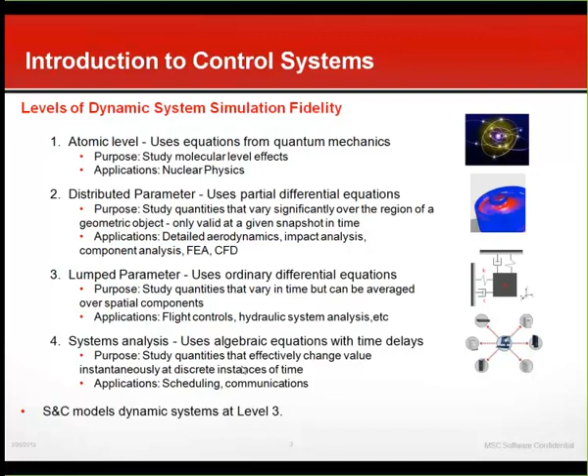Okay, so what do I get from the systems and controls modeling? The output is typically some plot of an engineering parameter, like the pressure at a certain point in your circuit, or maybe a flow rate through a valve, or a temperature somewhere as a function of time. So it's kind of performance type analysis.

Or maybe you're only interested in the steady state analysis, not the transient analysis - like maybe an aircraft environmental control system, where only the steady state performance is really important. Or maybe you've got a system with feedback control and you want to know if it's stable.

An example of that might be a nose wheel steering system on an aircraft - something that has a servo valve, and by changing the gain, if you make it too high, the system can go unstable. So that's a perfect application for control system analysis.

Another nice thing about this level of modeling is that you don't utilize CAD geometry, at least not directly. That makes it very useful in the early stages of design when CAD geometry isn't available, but you really need to hammer down design requirements, like how big your actuator diameter needs to be, how big your valves need to be, that sort of thing. So that's where it really comes into play - in the earlier stage when you're setting design requirements.

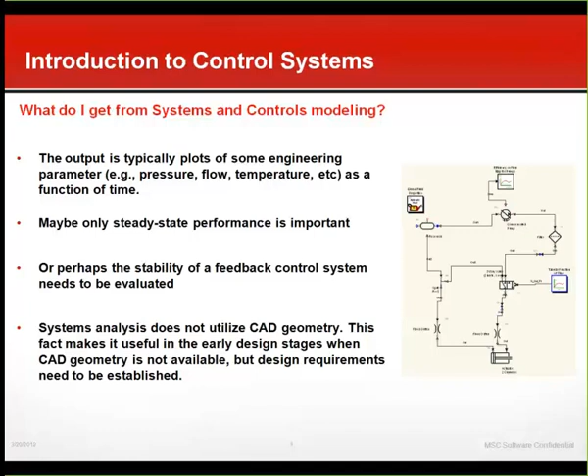There's a couple of different ways you can model systems in these type of programs, like I'm going to talk about with SimXpert, but they all use a block diagram approach. Let's say we start with a simple mechanical system we want to model, like this mass spring system. If you do a simple force balance on it, you can see that the external force minus the damping and the spring force equals mass times acceleration.

So if we wanted to create a block diagram of this model that we would use in a control system package, not just ours but pretty much every package works this way, what you'd want to do is solve for the highest derivative, like I've done here, and then you'd pretty much go from there.

So you can see you'd create a summing block right here, and you'd sum in the external force, the damping force, and the spring force, and then you'd multiply that by 1 over m. That's what this 1 over m here is, and that would give you the acceleration.

Well, the schematic's not quite done yet because everything's got to be hooked up, right? So what we do here is we'd integrate twice. As you can see here, I've got two integrator blocks. And so after I've got the first derivative, I'd pull off that and multiply it by B and feed it back as the damping force.

And then for the spring force, you need to have Kx, right? So now you'd pull off of the second integration operation here, so we're going to have x at this point. You multiply that by k and feed it back. So this is how you would represent a control system in a block diagram. This is kind of the brute force method. If all you have is a differential equation and you need it solved, this is how you would do it.

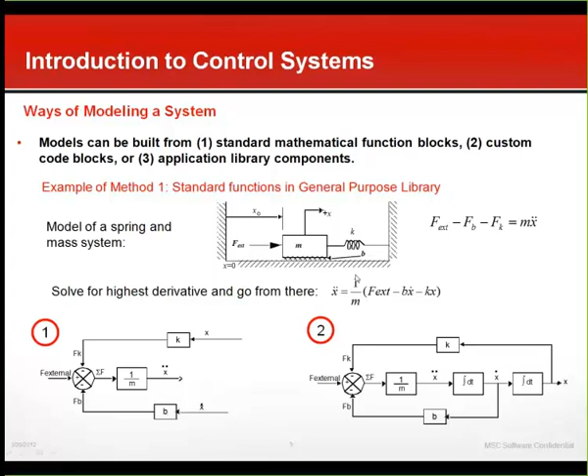But there's other ways to do this in our software. Another way you might want to do it is maybe you want to create a block of your own, and you want to do your own calculations behind that block. So you could create a custom code block where you specify what the inputs and outputs are from the other blocks in the system, and then you write some code around that, basically either in Fortran or in C, to calculate the output of that block based on the inputs.

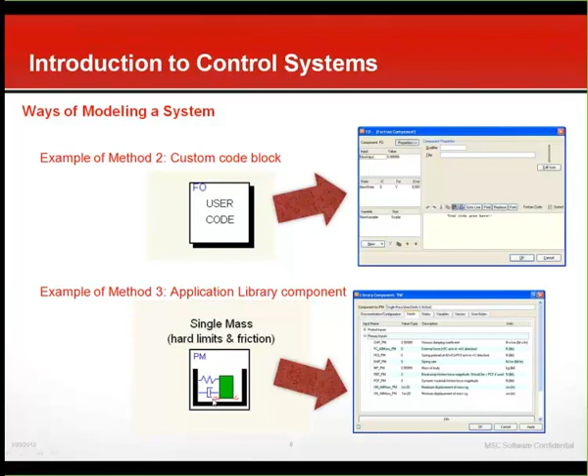And then the third method, if you've got a really complicated system, obviously you're not going to want to write all the differential equations out. So we have libraries that have blocks that include the differential equations behind them. In fact, we have a block called a single mass block, which is effectively a mass between two hard limits with a spring and a damper. So you could just drag that block onto the circuit and be done with it. Basically all you have to do is specify the mass and these damping and spring constants, and then you'd be done.

Okay, so what about applications? Well, we see applications in almost every area of engineering you can imagine. This lists various ones here: powertrain, controls, automotive, flight dynamics, you name it. We've got customers that are modeling these types of systems.

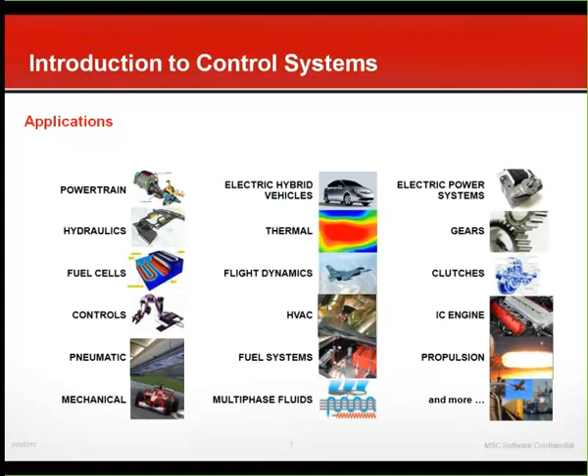And then what happens too, we find often, is that somebody's modeling a plant or some kind of system or controller inside of our solution, like whether it be SimXpert or Easy5. And typically, if they're trying to control something, they want to hook it up to a mechanism, because that's often the case. You can think of something like an active suspension. You'd want to model the mechanical parts in the motion side, but then the hydraulic controls you'd want to model in the system side, and then eventually the idea is if you marry them together so that they're solving at the same time, you'll get a much more accurate solution.

Because quite often there's quite a bit of coupling between the dynamics of the two systems, and so you can't really just analyze one side of the system independently without making a bunch of simplifying assumptions that could get you in trouble.

Another thing we can do is we can also account for part flexibility on the motion side. So you can think of maybe a part on this ATV here, like maybe the suspension component. Maybe it's important to model the flexibility of that. So we have ways that you could create a finite element representation of that rigid body and then bring that into SimXpert from the structures workspace, and now you're able to tie in both motion, or all three actually, motion, controls, and FEA in one environment. So it's pretty powerful capability that we have here in SimXpert.

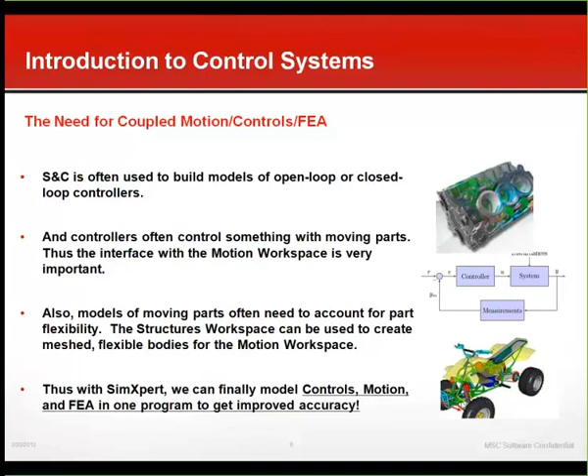Okay, so next slide. So what would be applications that were good candidates for this?

Basically any type of industry or problem where you've got this coupling of motion and controls. Like an active suspension, a missile guidance system, or the hydraulic control of a mechanical backhoe. In manufacturing, there's robots for assembly. In aerospace, you could have a flap system driven by a hydraulic control system. So there's really an endless number of applications for this.

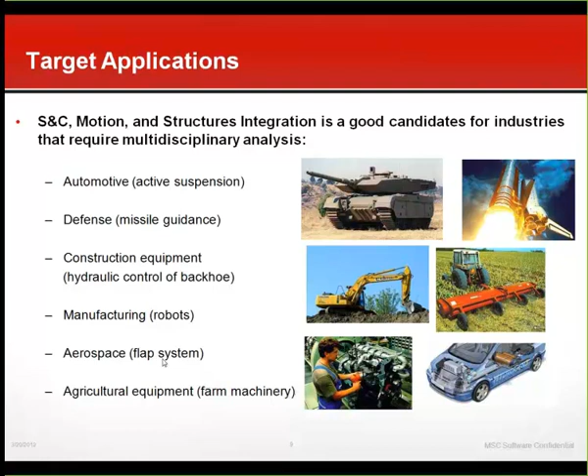Okay, so now I'll talk a little bit about our software solution, what we offer. We offer a product called SimXpert, which has been out for a couple of years, and it's really a revolutionary way of looking at analysis. It uses one graphical user interface, SimXpert, but it's got multiple workspaces for doing different types of analysis.

So the idea is maybe you bring in this landing gear model with all the geometry, and if you want to do finite element analysis, you'd work in the structures workspace, where you'd see menus for meshing, applying boundary conditions and loads. Then if you wanted to switch to motion analysis, you'd switch to the motion workspace, where you'd see menus for things like applying forces, setting up joint constraints, and that sort of thing.

The one that's a little bit different is the system controls workspace, because it doesn't use geometry like I mentioned—it uses a block diagram approach. We also have a template builder workspace, which is block diagram based, but in the sense that you're not really modeling a system, you're modeling a flow process.

So you could lay out a flow process where you say, I want to take this part, mesh it, then the next step is applying a boundary condition, then the next step is I run the analysis, and the next step is I run a motion job. So it's a very powerful way to automate and chain these different types of analyses together.

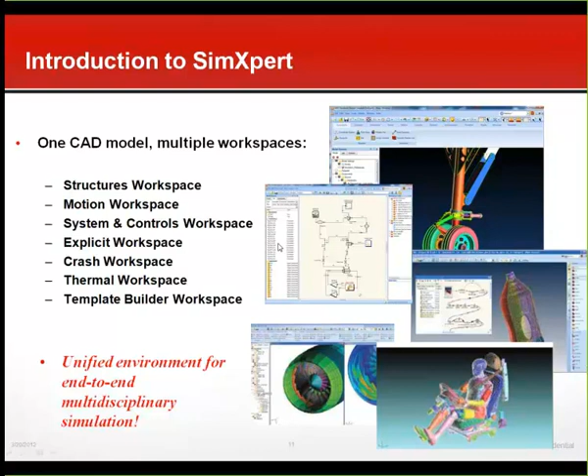In the system and controls workspace, we have some application libraries to help you out so you don't have to create all these blocks yourself. We have a thermal-hydraulic library with pumps, valves, accumulators, and actuators, things you'd find in a hydraulic system. We also have a gas dynamics library for modeling typically high-pressure pneumatics, compressible flow—like on the F-22, it's got a high-pressure nitrogen missile ejection system.

And we have a multi-phase fluid library, for any type of fluid that can change its state from vapor to liquid at any point in time. Typically that's used in heating and air conditioning systems where you've got evaporators, condensers, compressors, things like that. We also have an aerospace vehicle library.

This one, there's no charge for actually. We supply it as is because it's not actively updated or maintained. But if you want to do pretty simple or even fairly complicated aircraft 6-degree of freedom motion, unconstrained motion, and you want to apply turbulence and gust forces and things like that, the aerospace vehicle library is good for that.

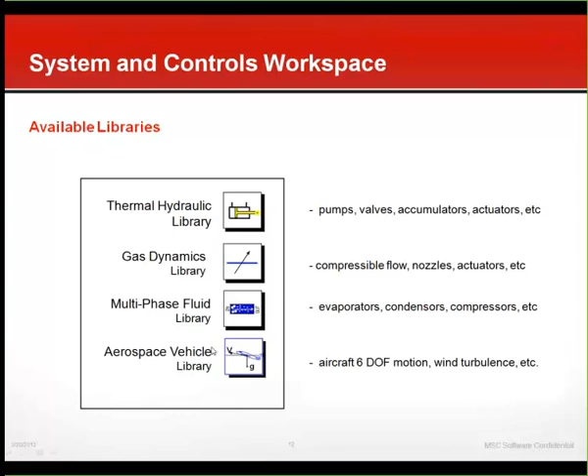Okay. So I mentioned EASY5, I think, a few minutes ago. Traditionally, EASY5 has been our standalone package that we've offered for modeling controls and systems.

And now what we've done in SimXpert is created this new system and controls workspace, which you can pretty much think of as EASY5 inside of SimXpert. But we've added some nice features in here that aren't in EASY5 currently.

For example, we've got a model browser, this tree, that's basically a model tree. You're able to run Python scripts and create templates. It's a much more modern interface. We've got an easy way to connect with motion.

This INF file—if you've ever hooked up EASY5 and Adams, you know you have to generate this INF file, which you don't have to do anymore. There's a spreadsheet tab, which is shown over here on the right.

So in EASY5, if you wanted to change a parameter like the RPM of a pump or something, you'd have to dive down into that component, double-click it, open up the model editor, and then change the value. Well, in this version of SimXpert, we have basically a spreadsheet tab where you can see all the variables at once and just change the value in that spreadsheet without having to dive into each individual component. So that's kind of a time saver.

And then we've also got a new GNU compiler. That's the free compiler that comes with EASY5. It's got some more powerful features than the previous one. So there's quite a bit of nice things here that we've added in the system and controls workspace.

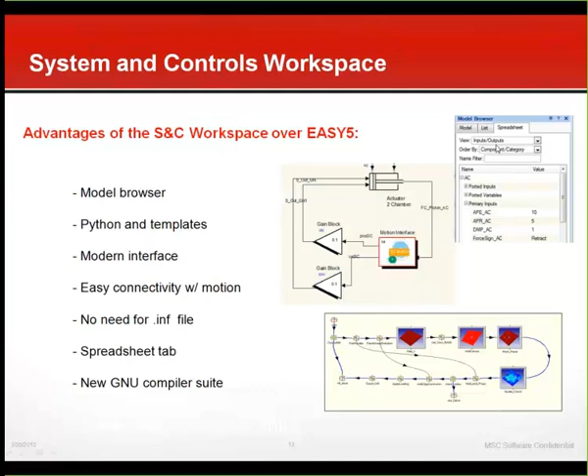I'll talk briefly about the ways we can hook up motion and controls. I don't want to get into this in too much detail, but there are basically 3 ways you can do it.

You can have the controller, the control system model, converted to a DLL, a binary DLL, and then link that in with the motion side. That's one way. The advantage is you're working from the motion side, so you can animate the mechanism and everything from the motion side.

The two other ways are functional evaluation and co-simulation. These two aren't in the current release of SimXpert, but they will be in SimXpert 2012. In functional evaluation, you're actually running the simulation from the system and control side, solving all the equations, both the motion and the controls equations, using the controls package. That's probably the least popular method.

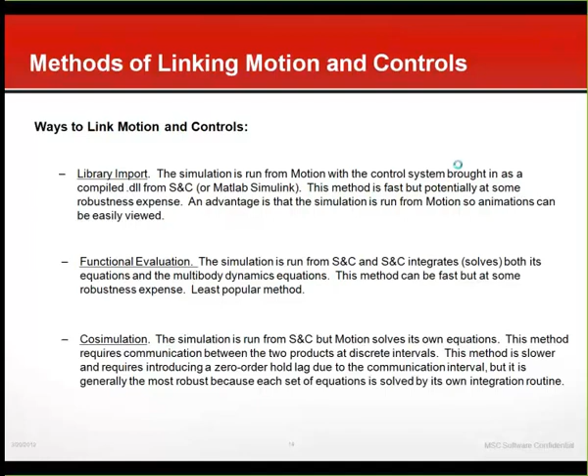The third method is co-simulation, where you're passing data back and forth at a fixed time interval, and each program is solving its own equations of motion. The advantage is it's the most robust method, because each program is tuned with its own integrators to solve its own type of problems. A disadvantage is you have to add a communication interval, which adds basically a zero-order hold between intervals, and if you make the intervals too big, your solution can start to deteriorate. So there are advantages and disadvantages to each way.

Now I'm going to do this demo of this landing gear model. You can see it's got an actuator here - this is what raises and lowers the landing gear - and it's got lock links that go over center and lock into place.

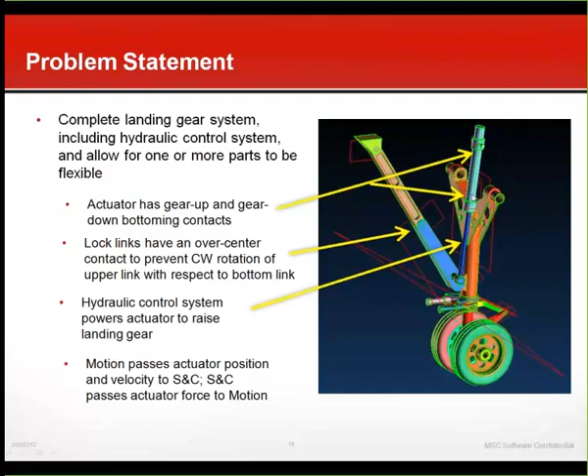So what we're going to do is have the control system calculate the force that this actuator generates, which will be provided to the mechanical model you see here, and then the mechanical model will pass back its position and velocity to the control system model.

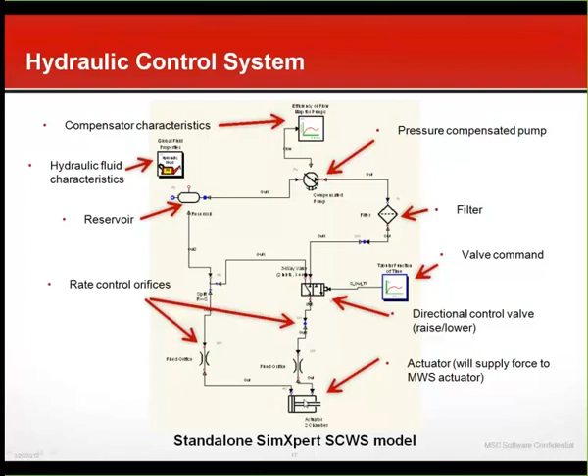Here's the control system model. It's got a pump with a pressure compensated pump - that's what this map is here. It pumps fluid through a circuit, through a filter, and then it comes to a directional control valve which raises or lowers the landing gear. There's a signal input on this side to drive that valve, and then the flow goes through a couple orifices back through a reservoir. Here's the actuator that will supply the force to the real, physical actuator on the motion side.

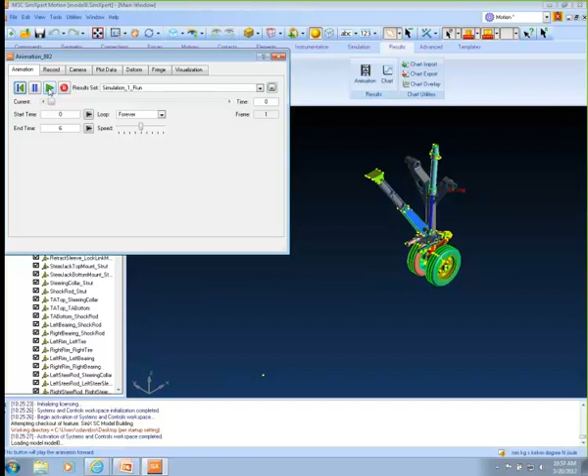Okay, so why don't we go ahead and get started with that. I've got SimXpert open here. Here's the motion model, and I've already got it set up. I can do an animation here, and I'll run this, and you can see that the landing gear extends and retracts.

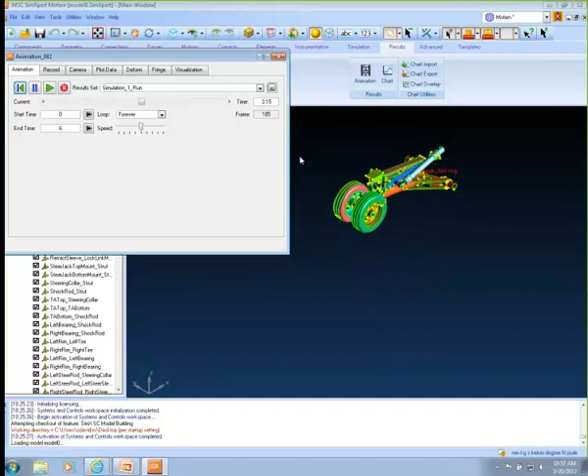So the way this model is working is that there's really no force in the actuator that's raising and lowering the gear. I actually have an applied motion on one of the links, so it's kind of artificial in that sense. It's basically just a kinematic model with 1 degree of freedom, so I mechanically move one of the links at a certain speed, and that causes the whole thing to come up and retract.

So what we want to eventually do is take this model and replace that artificial motion with the actual force that's coming out of the controls model. So now I'll switch over to the System and Controls workspace here.

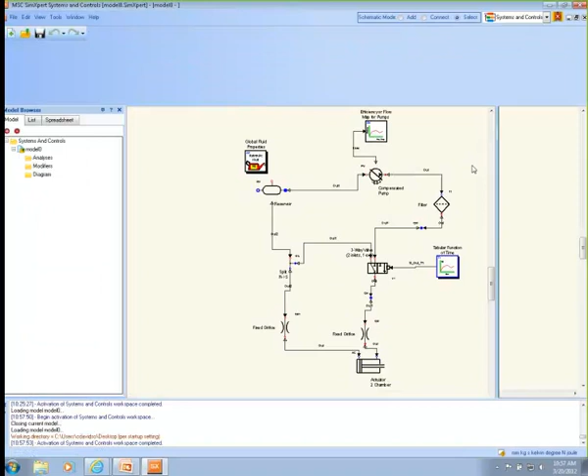And here's that hydraulic circuit that I showed a minute ago. The idea with one of these block diagrams is that each component has a component data table where you go in and modify the different parameters.

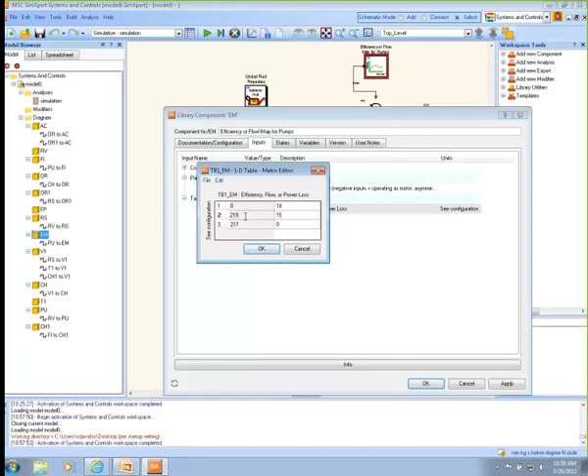For example, on this pump's pressure flow characteristic, I'm going to modify that slightly. This table shows the pressure versus the flow output of the pump, with pressure in bar and flow in liters per minute. So I'm going to boost this pressure characteristic up a little bit, so I get a little more pressure for a given flow.

Okay, and then I could go over to this. This is, like I mentioned, the block that commands the valve, and I've got a table in here as a function of time that drives the valve. So minus 100 is hard over in one direction, plus 100 is hard over in the other. I'm going to change the valve command at time equals 1.1 to 100, so the valve is commanded one way, then after 1 second I'll command it the other way, and at 3 seconds command it back again.

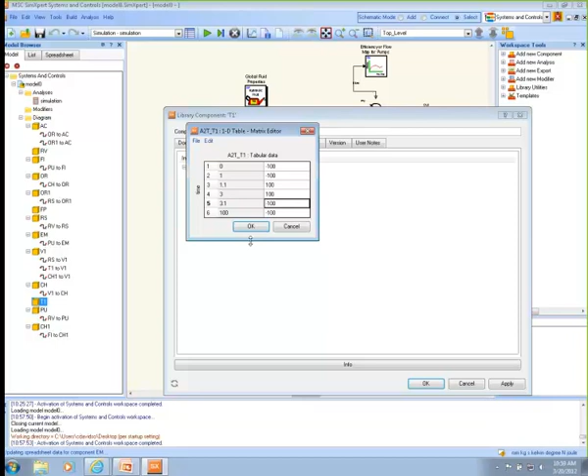Okay, so now I've got the standalone model. It's not coupled to motion or anything, so it's always a good idea to test it to make sure it works standalone before you try to hook it up to motion.

So I've defined a simulation here where I'm going to run this for 6 seconds. I can just right-click on this and say execute, and now it will compile the model, and then run it, which is what it's doing right now.

When it's done running, the plotter will come up, and you'll be able to plot any parameter in this model. So, for example, here's a variable called AX piston AC. Well, what does that mean? The naming convention by default is that the first part of the name tells you what it is, so AX tells me it's a displacement, actuator displacement. The second part, piston, tells me what port it's coming from, because components can have more than one port.

And then the third part tells me the name of the component itself. So this is a position coming from a port called piston on component AC. You can rename these to whatever you want; these are just the default names. So I'm basically plotting out actuator position here, and as you can see, it changes in mid-stroke.

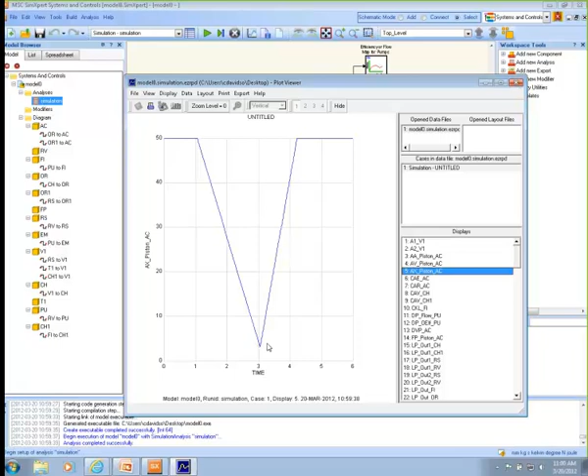Okay, so it looks like that model is working fine. And now what we want to do is hook up the motion. So the first thing we need to do is come to this actuator here and change its configuration.

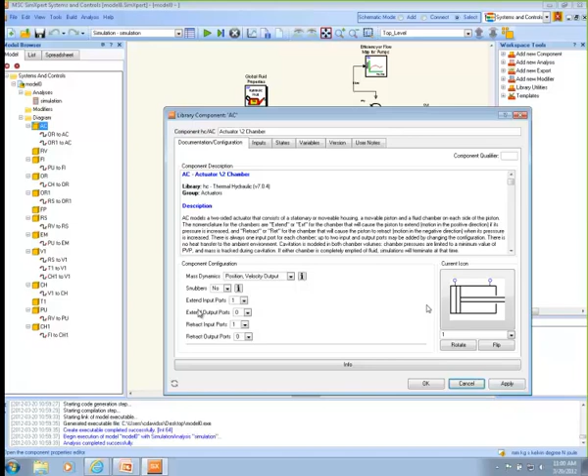By default, it's a position and velocity output, meaning it takes in hydraulic pressure, produces a force, and calculates the position and velocity. But that's not how we're going to operate this time. We're going to supply position and velocity from SimXpert Motion, and that's going to pass back force. So we need to change this to position velocity input.

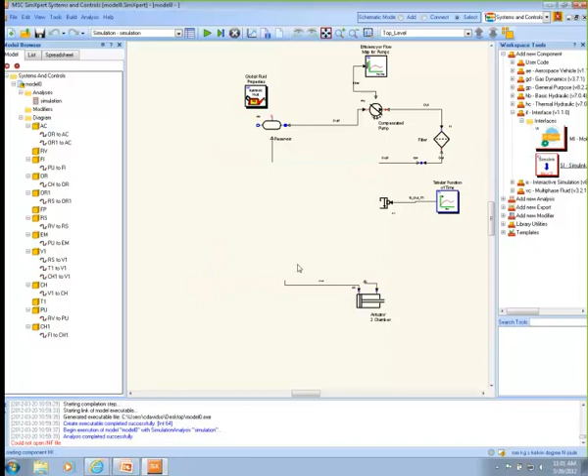That's the first thing, and then we need to bring out a new component, an interface component called a motion interface block. This is the actual block that represents the mechanical system, and the first thing I want to do is configure it. I'm going to have a couple of inputs and outputs: one input, which is going to be the force, and two outputs, which are going to be the position and the velocity.

Now I'll go over to inputs, and I'll just call this one force SC. And we'll call this one position SC, and we'll call this one velocity SC, for system and controls.

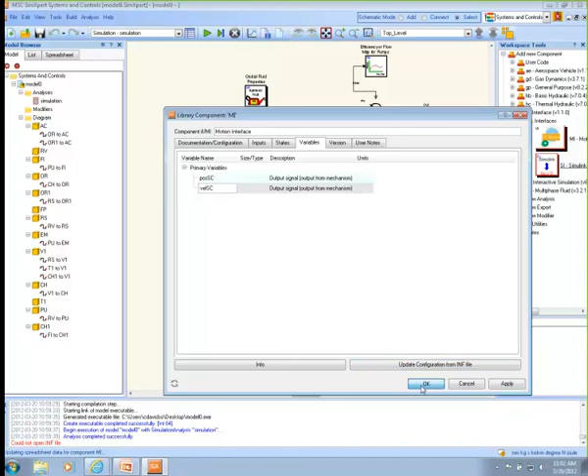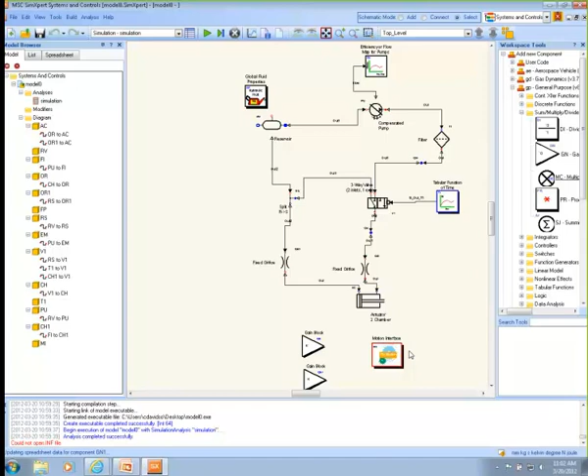Okay, so now I just need to hook this up to the rest of the model. First thing I'm going to do here is throw in a couple of gain blocks. The reason for that is currently in SimXpert, we haven't got all the workspaces working together in the same units. Most of the system workspaces I think do, but the controls workspace is working in meters, and the motion model is working in millimeters. So what I need to do here is create a conversion from millimeters to meters.

So I'm going to put in a scale factor here of 0.001. Like I say, I think in future releases you won't have to go through this step—it should automatically take care of itself.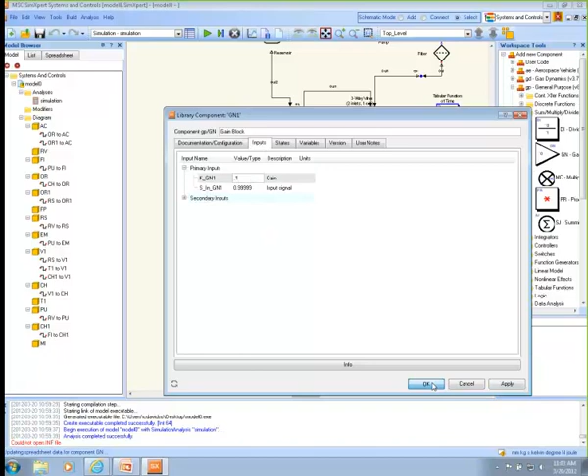Okay, let me zoom in a little bit here. So now what I'll do is I'm basically ready to hook this up.

First thing is I click connect, and I click on the actuator, connect to the motion interface. Then a block comes up and tells me what variables you want to pass. I want to pass the piston force to this variable I called force SC.

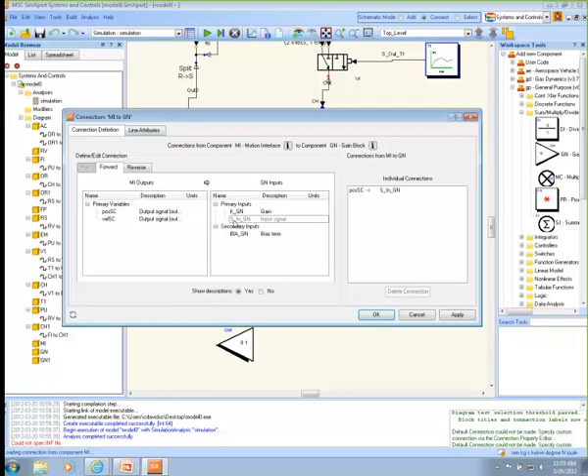Now I'm going to connect up the position coming out of the motion interface to this gain block. So I want position coming into the input of that gain block. There's the connection, you can see it there. Then I connect the output of the gain block back to the actuator, so the output of the gain block now is connected to AX, which is the actuator position.

Then we'll do a similar thing down here for velocity. We'll connect velocity coming out to the input of that gain block, like you see there. Then we'll connect the output of this gain block back here, where we connect up the output to velocity. Okay, so now you can see the system is set up with the two models connected.

Now I mentioned there were three ways to do this. I'm going to use the DLL import method. So I'm basically going to take this model on the hydraulics, export it out as a DLL, and then link that in with the motion side. The way I would do that is I have to first create what's called an export.

So we'll come over here to add new export. Export as motion interface. This just creates the object, I haven't actually generated it yet, so I'm going to have to do the compile right now. I can do that by just right-clicking on that and hitting export, and now that will export the model as a DLL. It's going to take a second here for it to compile.

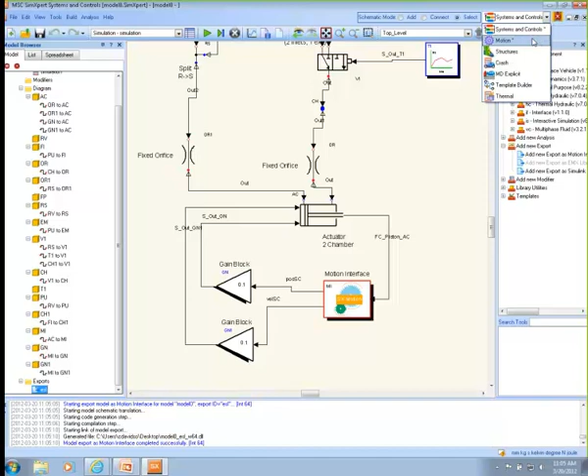Okay, so now I'm ready to go back to motion. And remember on the motion side, I had that artificial motion raising and lowering the landing gear, so I want to turn that off. I come up here to motion, to this retraction motion here, and I'm going to say deactivate.

And now I've got a force element in here, which represents the actuator force, and it's going to get its value from system and controls. So I'm going to have to activate that one.

Okay, and then finally, I need to bring in the DLL. The way I would do that is I'd go up to SC interface, and I'd select library. A library is another word for a DLL. And then I'll pick the library right here.

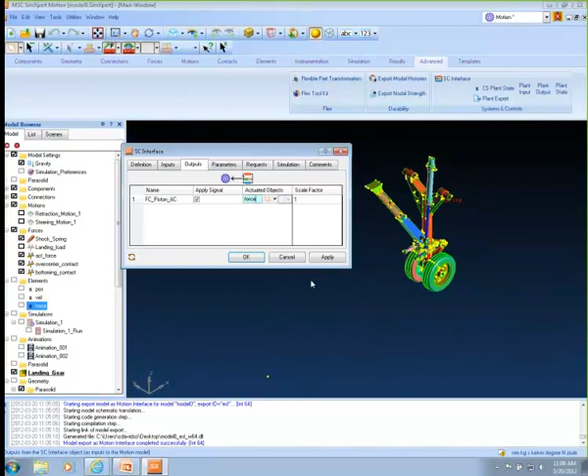And you can see it recognized the number of inputs and outputs. So I want to connect up the velocity back through a state variable I defined on the motion side called VEL. And I want to connect up the position to a state variable that I called position, like that. Then on the force side, I need to hook up the force to a state variable that I called force. Okay, so now this is where you keep your fingers crossed and hope that you didn't screw up somewhere along the way.

Because we're going to actually run the model now. So we'll come down to the simulation and hit the rerun. We're going to rerun the simulation now. Looks like it's running okay.

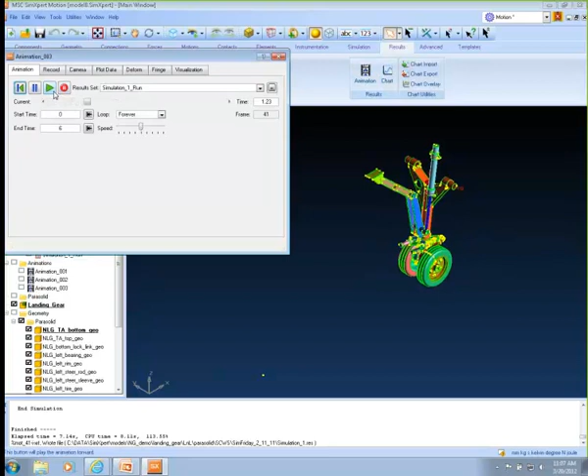Okay, so now I can do an animation again. Let's do it, yeah, let's plot another animation. So we'll go to results, animation. Now it may look the same to you, but I can tell that this is the force-driven one because it's coming up and down quite a bit faster. I kind of went a little bit overkill on the hydraulic force, so it's about 50% faster.

Okay, and then the last thing I just want to show real quick is the flex body integration. So let's just pick a part that we want to make flexible. We'll come down here and we'll pick this. Let's pick the top, the torque arm. Why don't we pick that? So we'll just make that as the only one visible right now.

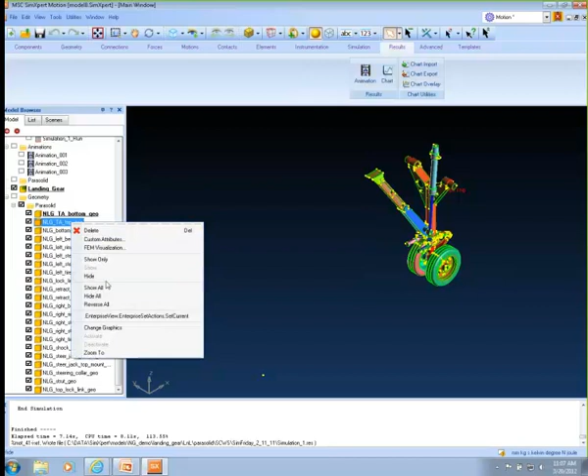So I'm going to make this a flexible part. First, I've got to change the rotation center somewhere around there so it rotates nicely. Okay, good.

Now, the way this is going to work is, remember there are idealized joints. There's a revolute idealized joint located at a point, and a spherical joint at the other end located at a point. So when we mesh this part, we have to basically spider back rigid body elements, bar elements from the mesh to the point where the joint is actually located. And to do that, we need to pick load-bearing geometry.

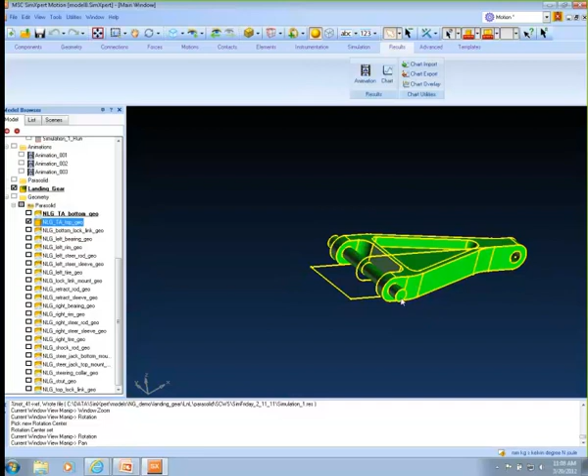The load-bearing geometry is actually going to be the surface of this pin. So we're going to select that as our load-bearing geometry from which to spider out the rigid elements back to the center of the joint. And we'll do something similar on the other side.

Okay, so the way we do that now is we go up to Components, and we'll look at the torque arm top. That's the component we want to work with. So if we double-click that, that brings up this form for that part.

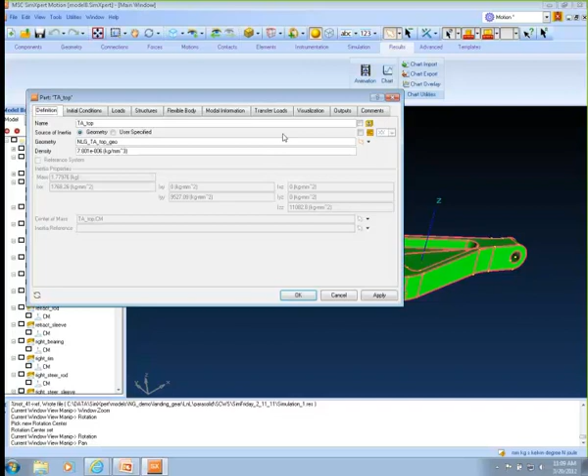And now what I want to do is go to Loads, and you'll notice that I have two joints on this body. I've got the revolute and the spherical, and now it's asking me for load-bearing geometry.

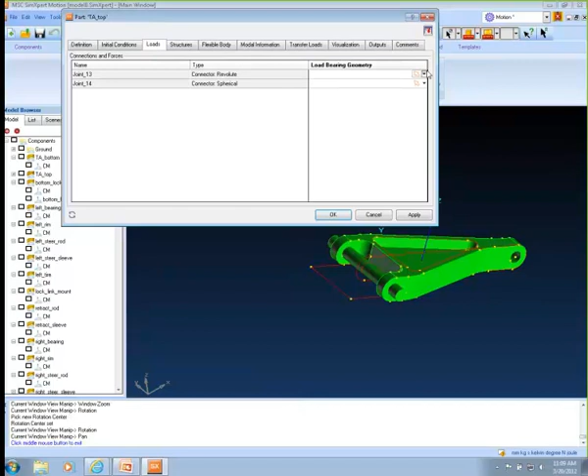So let me pick the load-bearing geometry for the first one. I go pick, and I'm going to zoom in here. So the first one we'll pick, let me zoom in a little more, is this surface, okay?

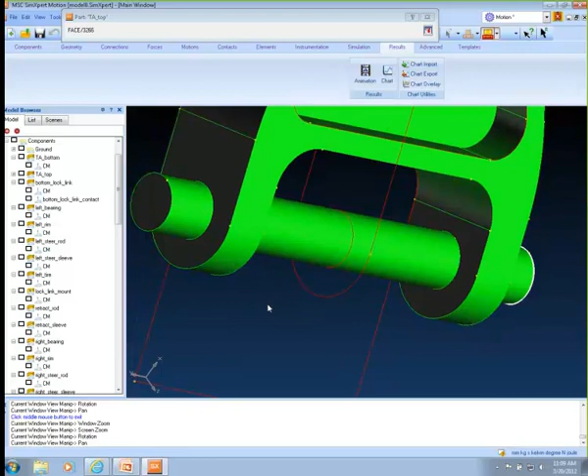And then we'll pick this surface here. Okay, so now back and I see I picked those two faces as the load-bearing geometry.

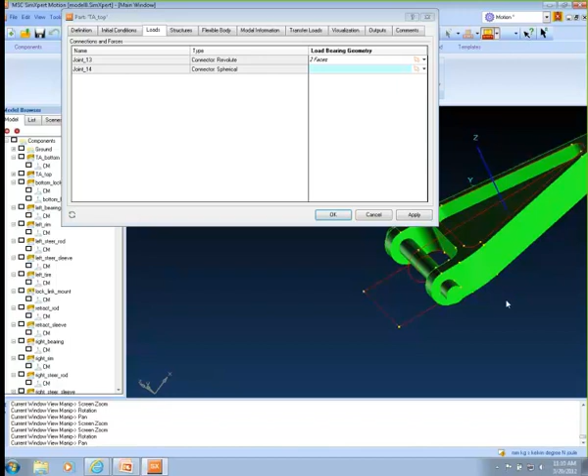Now I'm going to go to the other end, and I'll pick the center of that hole to be the load-bearing geometry, like that. Now I've got my load-bearing geometry defined.

And now the last step in the demo, really the last thing I've got to do, is go over to the Structures tab. This is where it tells the Structures workspace how to create the flexible body. So I have to give it a typical element size. We'll say 20 millimeters.

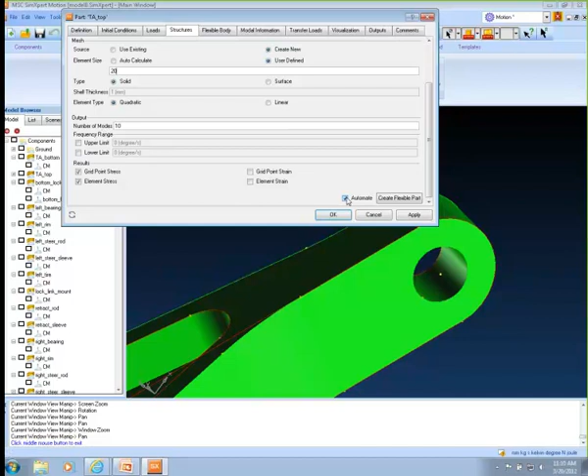And we're using quadratic elements. We're going to carry 10 modes. And we hit the Automate button, and then create a flexible part.

Now it's switching over to the Structures workspace, where it's going to mesh the part. It's going to run a modal analysis to capture the natural frequencies and mode shapes. Because on the motion side, we're going to represent this body in modal space. The reason for that is just to reduce the number of degrees of freedom. So it does require an assumption that your model is linear.

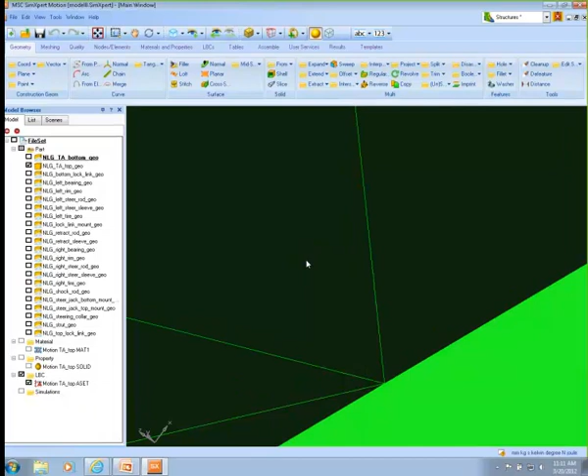It's still working here, but in a second it should switch back to motion. So really what this is doing is running the modal analysis, and also writing out what's called a modal neutral file, which contains all the mode shapes and natural frequencies. And that's what the actual motion workspace works with.

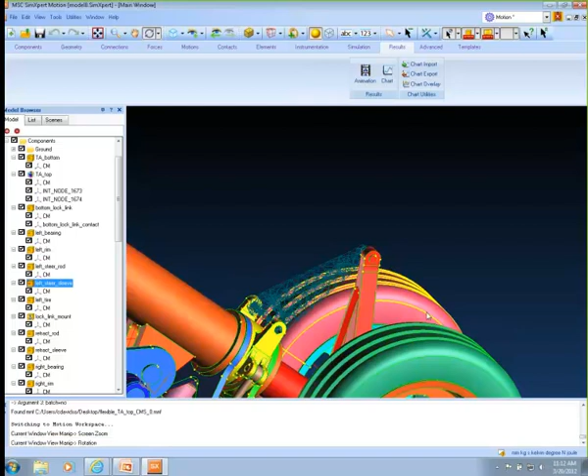Okay, so you can see now I'm back in motion. Let's just make every part visible here. And so now you can see that this part is now a meshed part. Now this is kind of a trivial example, I guess, because this part really doesn't have any loads on it. But let's just run the analysis.

And so what I can do now is just go back to simulation here and rerun that simulation again.

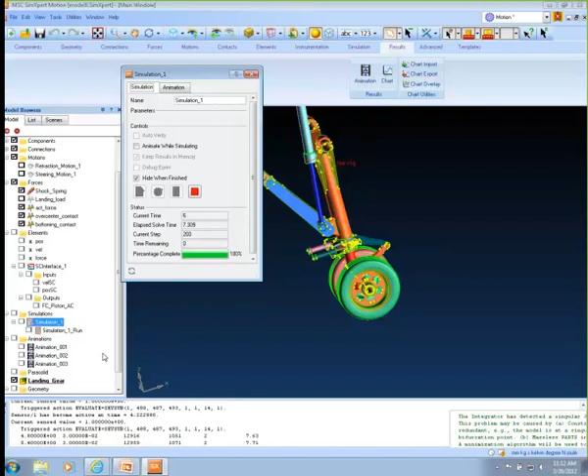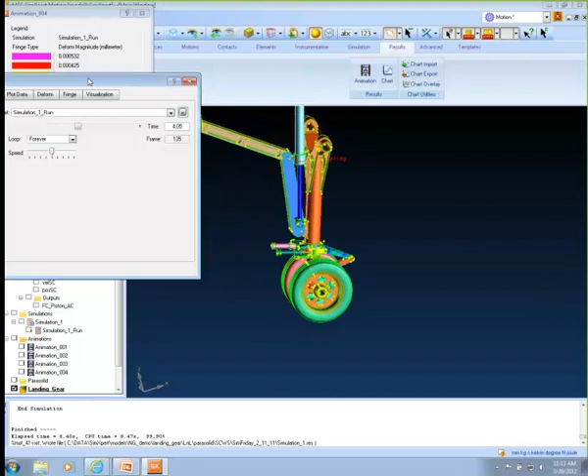Okay, so now if I want to animate that, go to animation, hit the go button, and you can see that now, if you look down here, the part is actually meshed there. There's really not much deformation going on here because, like I said, it's not loaded. Let me see if I can get this out of the way and zoom in a little bit.

So that's really it. That's how you would integrate a motion, structures, and controls model in SimXpert.

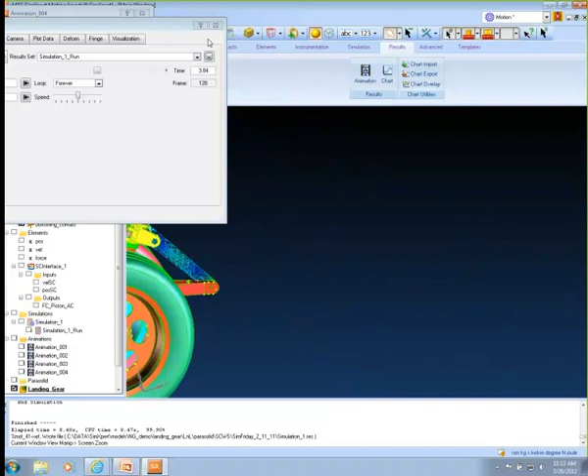So let me just go back now to the PowerPoint briefly, to a summary. So really, the main takeaway from this, if you forget everything else, is that sometimes high accuracy requires modeling the coupled physics between motion and controls and maybe even finite element analysis.

And we have the ability in SimXpert to couple all those in one environment. And we offer flexibility into controls. I really didn't talk about this much, but you can use either our system controls workspace or you can use MATLAB Simulink, since I know there are a lot of users out there that use MATLAB Simulink.